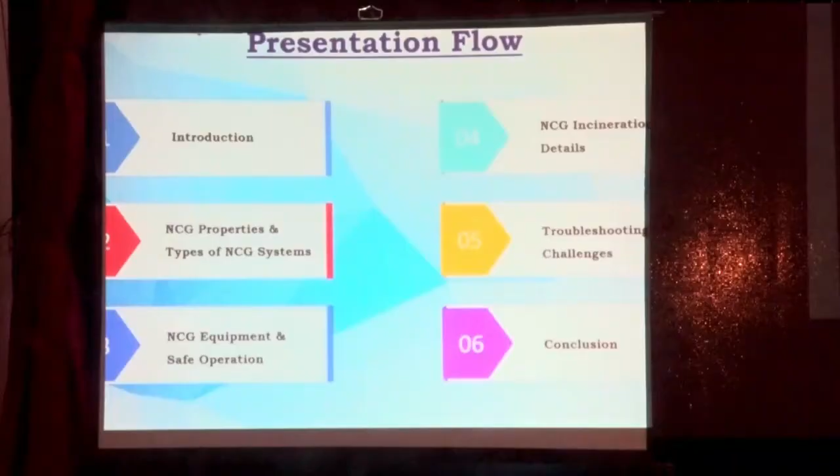Now going to the presentation. This is the flow of presentation. First we discuss about NCG. Then regarding our organization, Andhra Paper Limited. It's one of the largest integrated pulp and paper manufacturing companies in India. We produce all varieties of paper like writing, printing, copier, cup stock, cup bottom, and the LIFE.

I take 1 minute to describe to you about LIFE. It's a program we are following in our organization. LIFE is nothing but a program focusing on upgrading our conditions, updating our procedures, policy and technology through employee engagement. The main focus is an accident-free workplace. There are different major focus areas.

One is machine guarding, motorized equipment, and in that one major concept is exposure to harmful substances and environment. That's why in LIFE we take NCG as a safety element, and in this LIFE program we train our employees and update our technologies to improve our workplace.

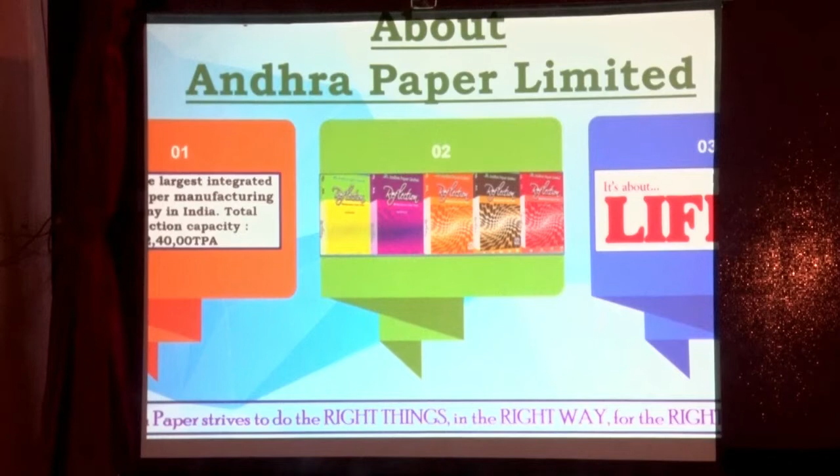Now regarding NCG, NCG are the byproduct of cooking, washing and operation of the evaporator process. After condensing these gases, those which are non-condensed are called NCG. These damage our environment and create nuisance odor. So in the NCG system, we collect and destroy the gases for a safe and hygienic workplace.

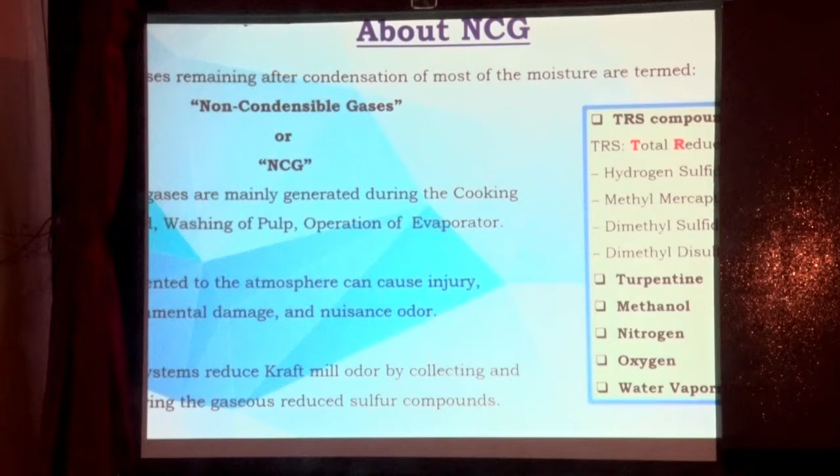The main components of NCGs are hydrogen sulfide, methyl mercaptan, dimethyl sulfide, and dimethyl disulfide. Also turpentine, methanol, nitrogen, oxygen, and water vapors are present in NCG. The properties of NCG: these are noxious, meaning a little bit of gas also creates foul odor.

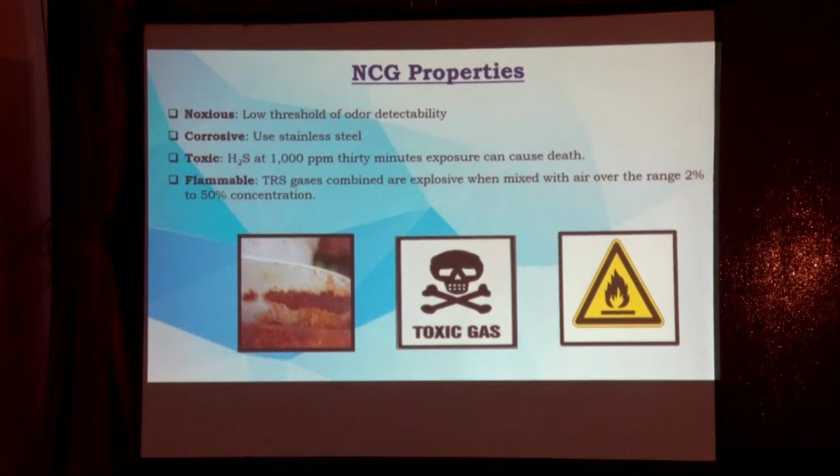These gases are corrosive. Due to these, our equipment corrodes and is destroyed. These gases are toxic. H2S at 1000 ppm exposure within 30 minutes can cause death, and these gases are flammable in nature.

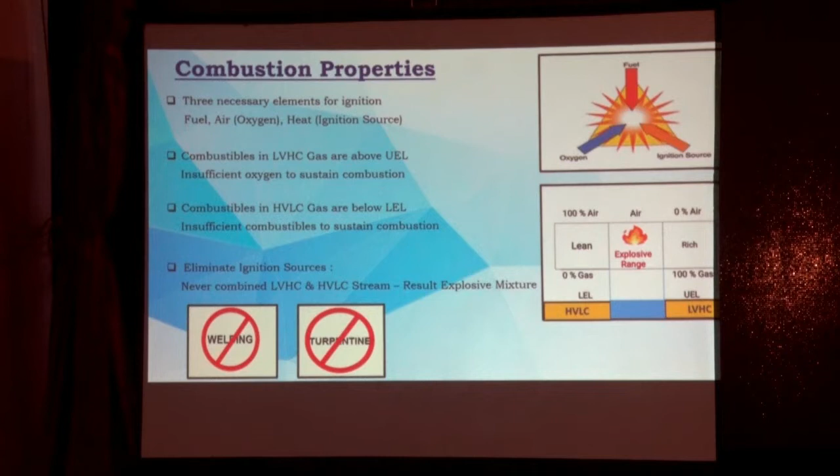Combustion properties of NCG. For combustion of anything, we need oxygen, fuel, and an ignition source. In NCG, fuel and oxygen are already present. If any ignition source comes, it may cause fire and combustion.

Explosive range: we must know the explosive mixture. In different areas, we collect different compositions of NCG, so their properties and nature are different. Oxygen is already present. If you mix these two kinds of mixture, it can create an explosive mixture in NCG. So it explodes, and we are not able to mix these different sources of NCG together.

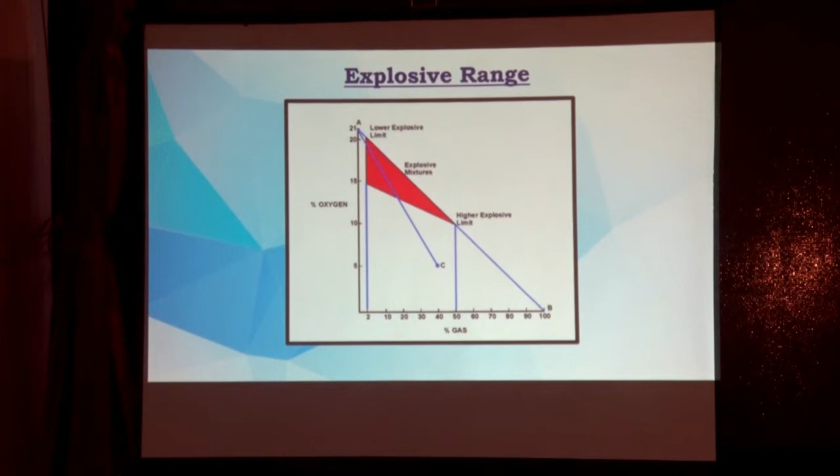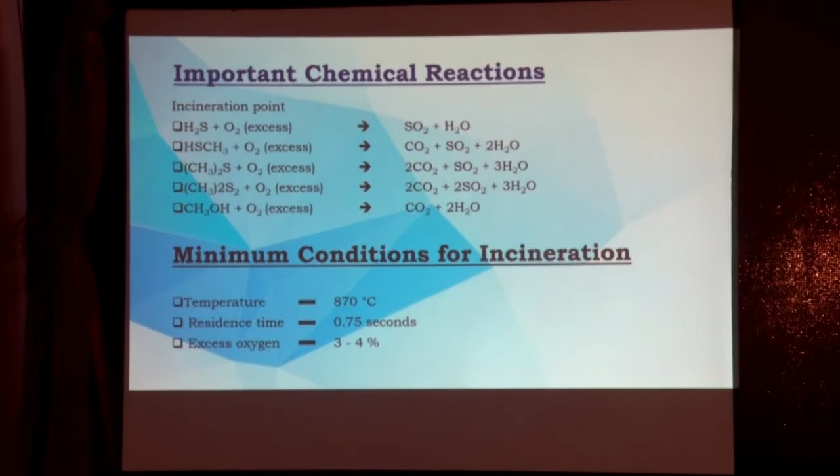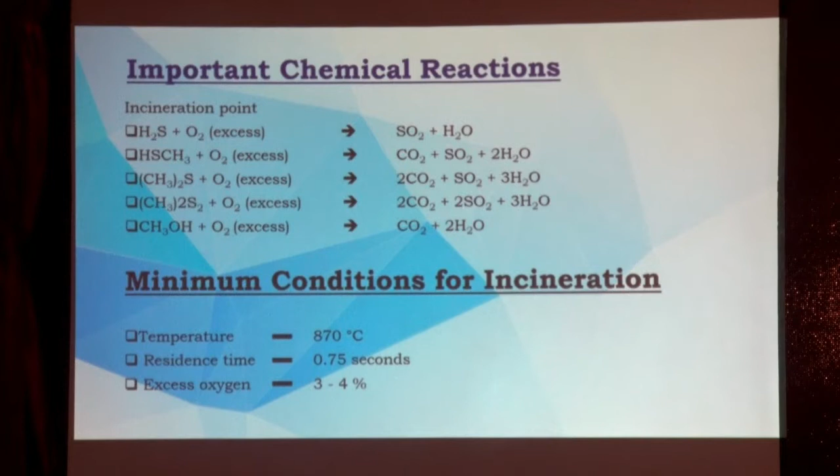This is the chemical reaction that happens after incineration of NCG, and the final product is SO2. The minimum condition for incineration of NCG is that we require 870-degree temperature, residence time of 0.75 seconds, and oxygen of 3 to 4%. If this minimum condition is not satisfied, then NCG is not incinerated and it goes to atmosphere.

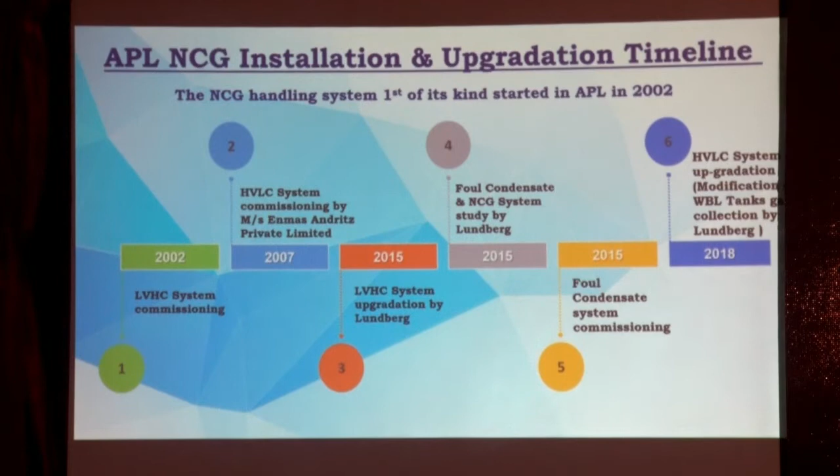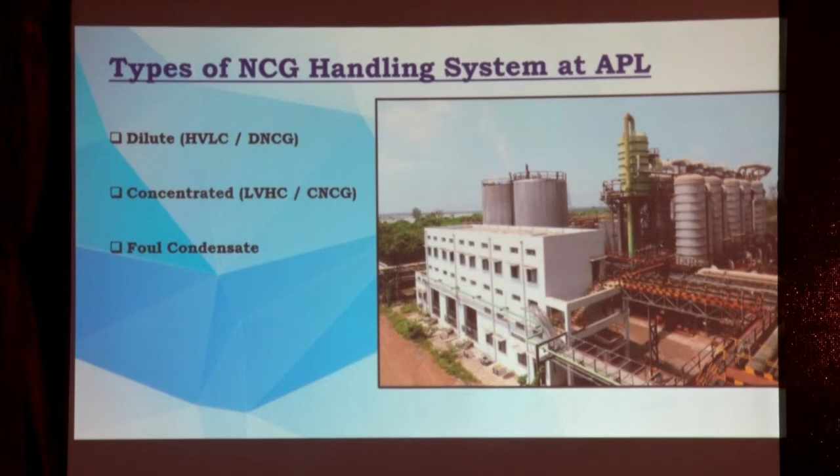In Andhra Paper Limited, we collect dilute NCG, concentrated NCG, and foul condensate. HVLC non-condensable gas is the dilute NCG gas. It is mainly high volume and low concentration gas. The sources of the gases are blow tank, filtrate tank, liquor tank, chip bin, ODL blow tank. Main composition is organics, TRS traces, air, and majorly water vapor. The property of this gas is high oxygen and low combustibles.

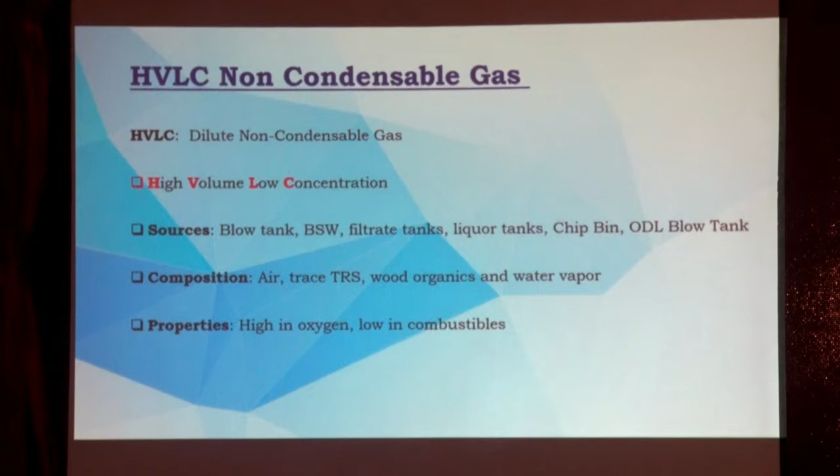Next, LVHC non-condensable gas. This is concentrated NCG gas. The source points are evaporator area, vacuum pump, seal pit, and foul condensate main tank. Composition of this NCG is majorly TRS compounds and less water vapor, and the property is high in combustibles and low in oxygen.

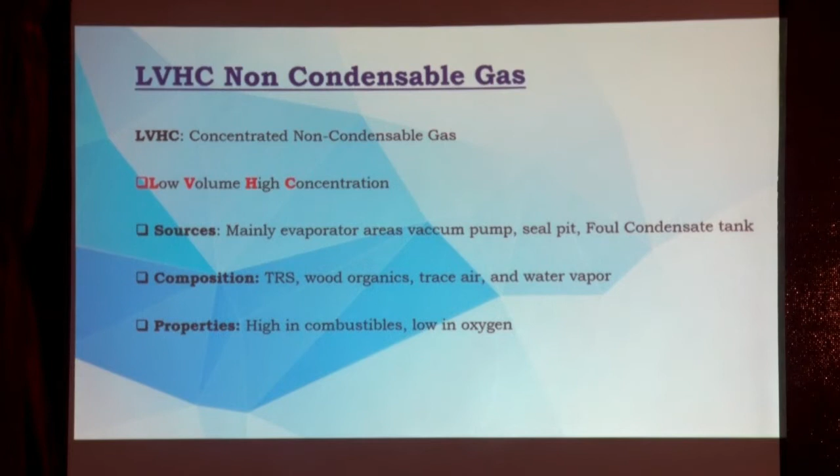Foul condensate system. Up to 2015, we did not collect foul condensate. We just drained it out, but due to the smell issue, we are now collecting it. The source points of this foul condensate are evaporator, vacuum pump, and NCG lines. Composition is mostly water, a little methanol, TRS, turpentine, and organics. Property: with turpentine content it is combustible, and we treat this foul condensate by oxidizing with hydrogen peroxide, and after that send it to ETP.

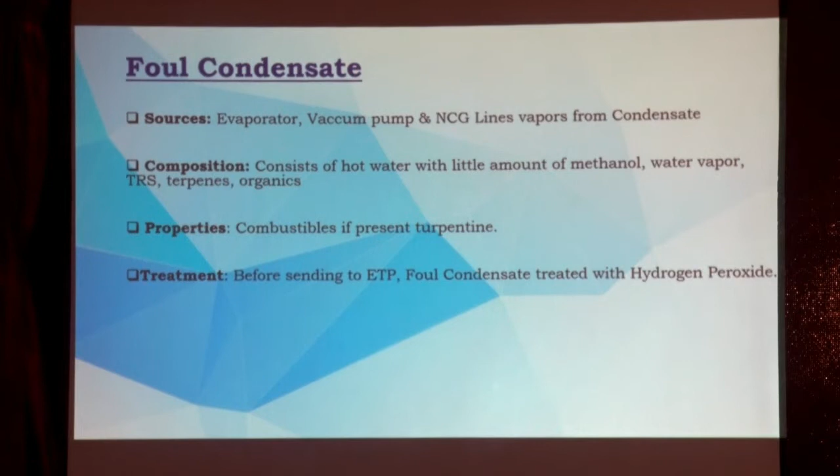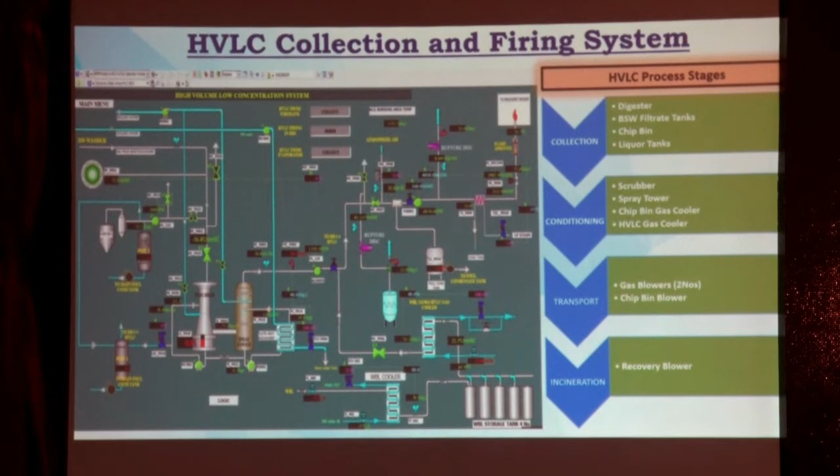This is our HVLC collection system. There are two streams. One stream is a fiber line, where we collect gases from digester, ODL and filtrate. And the second stream is WBL gas.

In digester, in pulp mill, first we collect these gases and scrub it. In the scrubber, we scrub methanol and fiber particle. After that, these gases go to the spray tower, where we cool these gases, and after cooling, the maximum vapor content is cooled down, and the NCG gases go for firing to recovery.

In WBL, we collect these gases and cool them down with a cooler, and after that, these gases go to recovery.

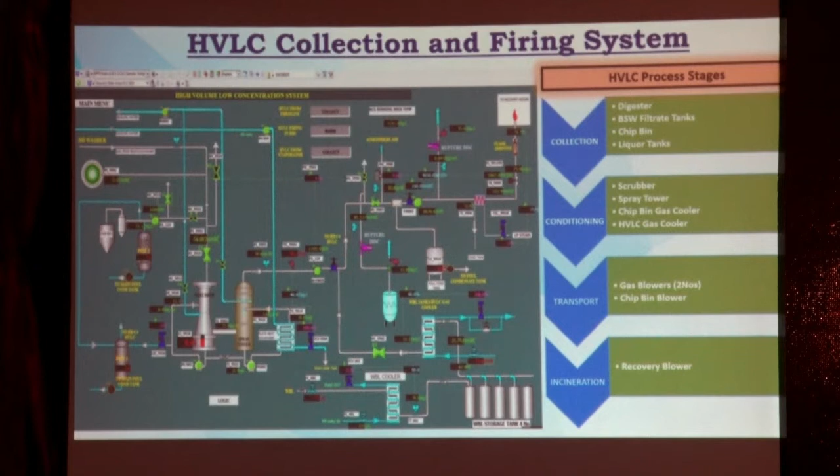In the LVHC system, we are collecting gases from the evaporator, foul condensate, foul condensate tank and evaporator seal pit. First, we collect these gases by ejector and fire in RLK, rotary lime kiln.

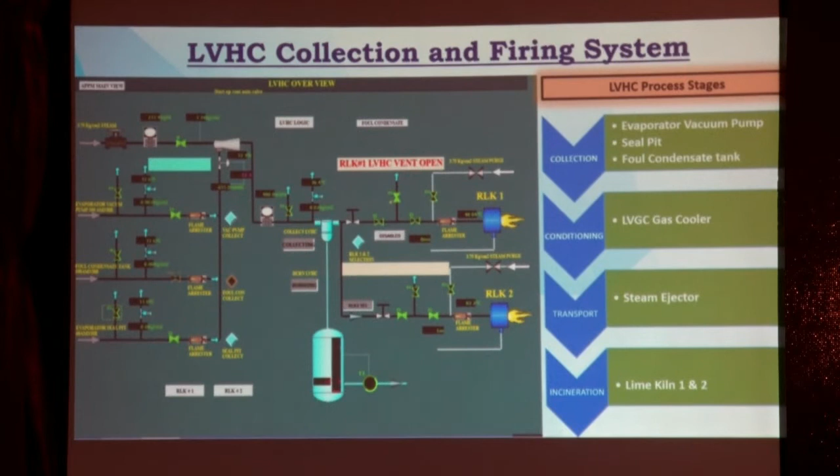Foul condensate, we collect from the evaporator, and there are LVHC and HVLC pipelines. We collect these gases and store them in the main foul condensate tank. After that, we are treating it with hydrogen peroxide and sending it to the ETP.

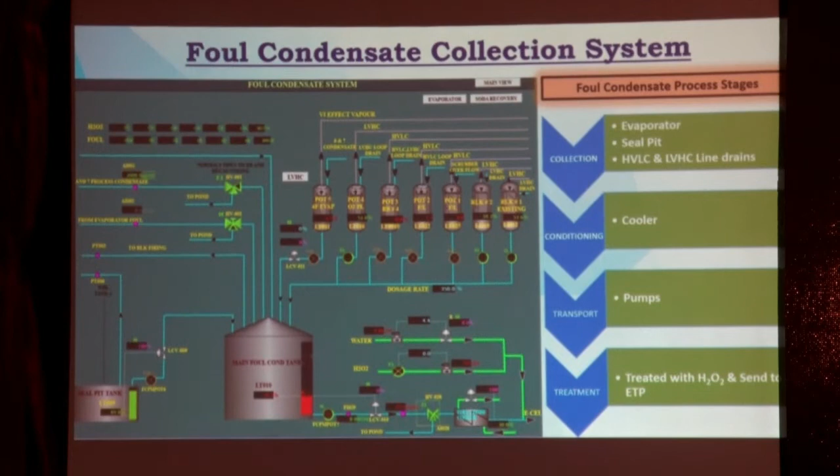Process safety equipment. For NCG handling, we handle flammable gas, so we require process safety equipment to handle these gases safely. In APL, we are using all these equipments for safety.

First we discuss the flame arrestor. It protects from flame burning back and protects live pipelines. So we are using this flame arrestor in source and incineration areas.

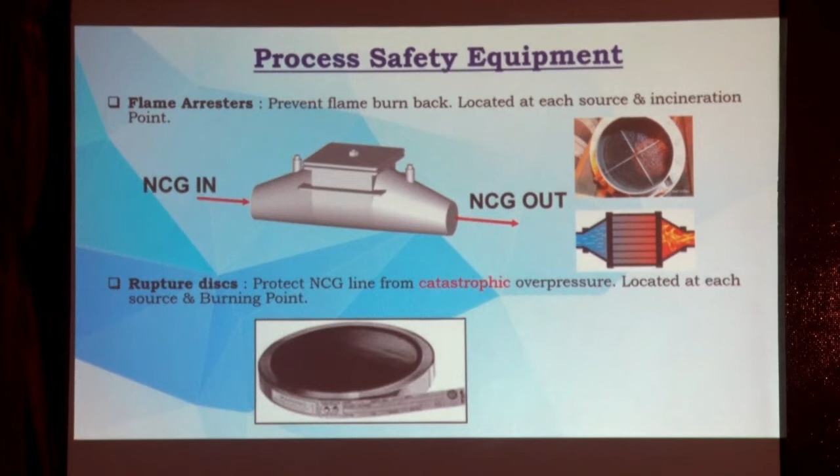Rupture discs protect fiber pipelines, and they are located near the source point and incineration point. Pressure vacuum relief protects tanks and seal pits.

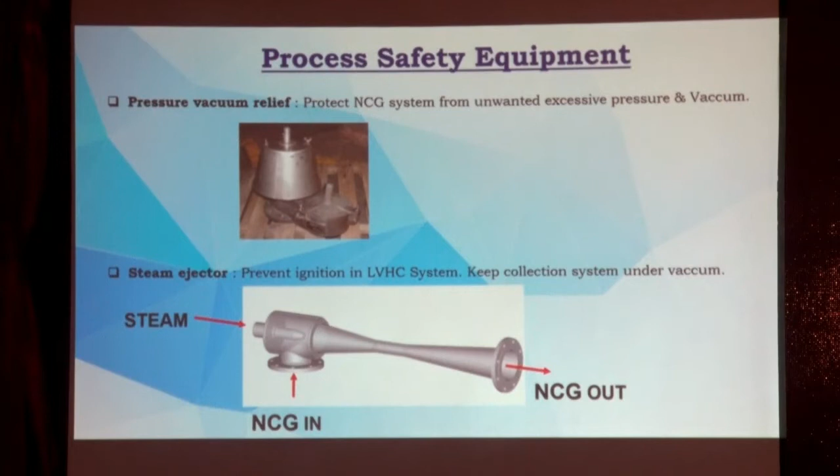Entrainment separator removes water droplets from NCG lines. It protects the system - all the condensed water is collected here, so that any water particles don't go to the lime kiln or recovery boiler.

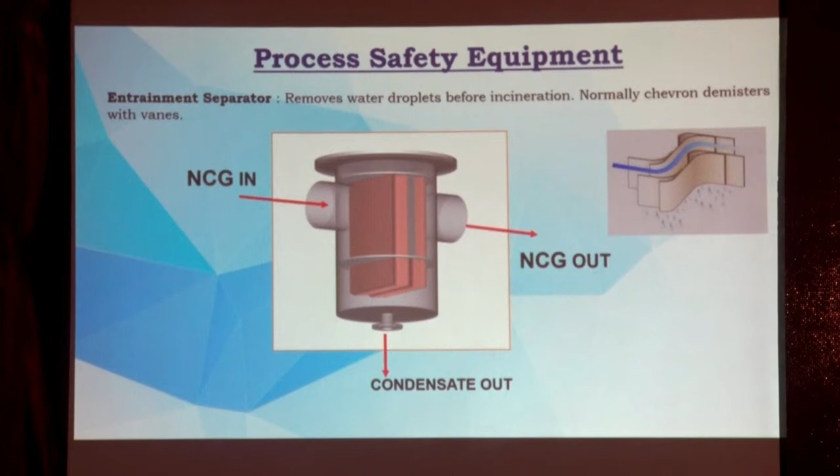This is our volume. We generate and handle NCG. Total LVHC is 460 Am3 per hour, and total HVLC is 3,500 m3 per hour.

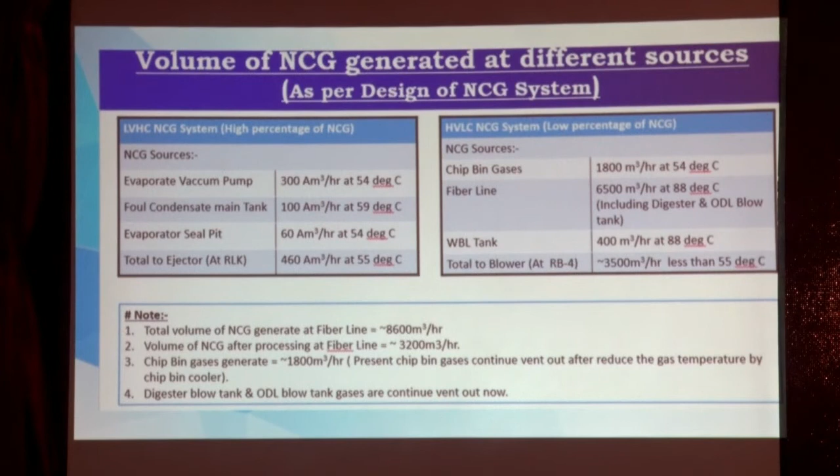We developed our own policy and procedure, and upgraded our system to handle the NCG. This is our best practice. For NCG handling, we monitor through DCS. There are safety interlocks in the HVLC and LVHC systems. Through safety interlocks, we protect our system during upset conditions.

NCG coordinator: this is a dedicated person we deputed as NCG coordinator, who coordinates the entire fiber line, recovery boiler and causticizing area, coordinating all three sections.

NCG system reliability and maintenance: we do this every annual outage and record it. Any incident in NCG, we analyze for root cause failure and do an action plan.

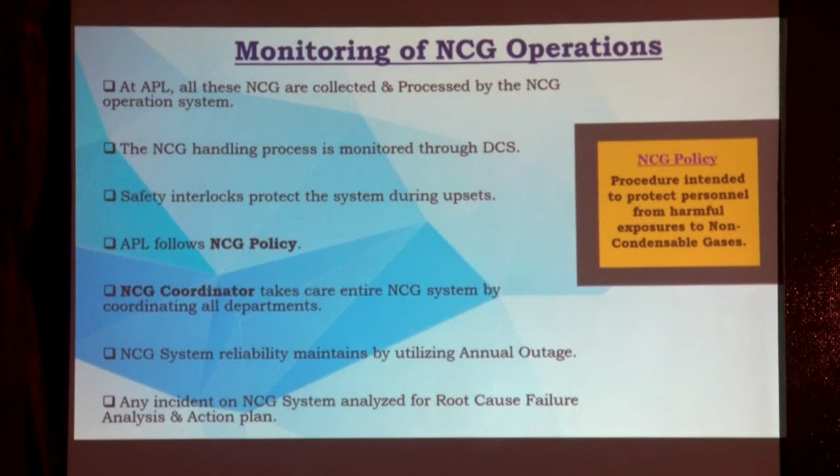We generate an NCG status report every month and update this report to our mill leadership team review, so the mill leadership team also focuses on the NCG system.

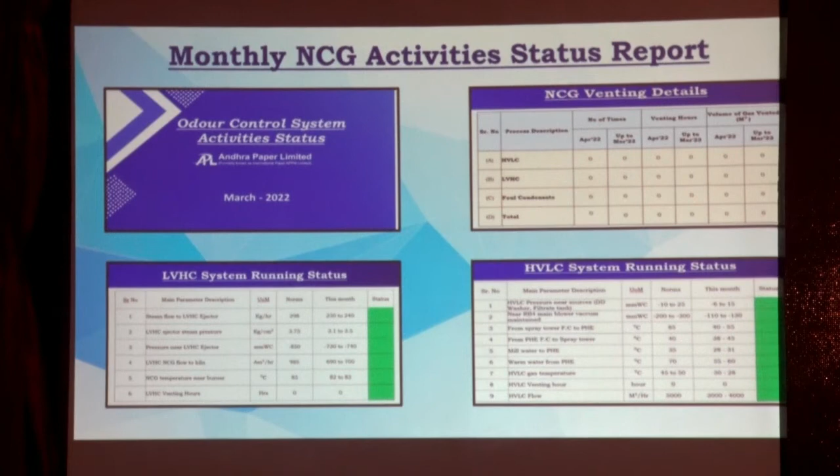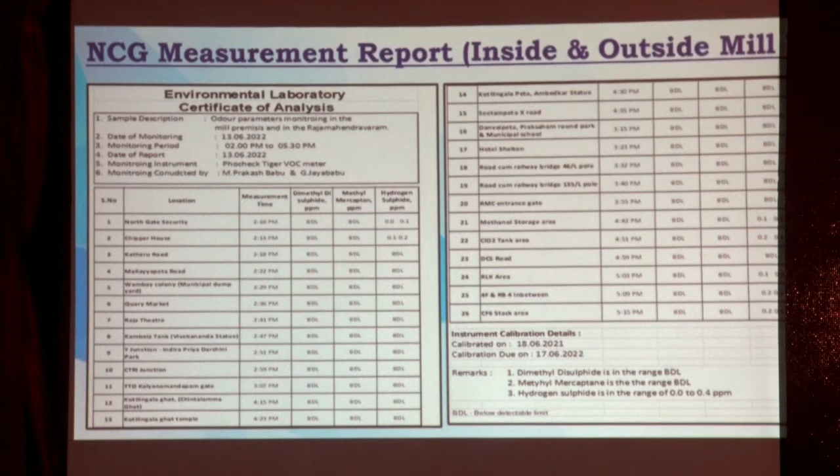This is our measurement report inside the mill and surrounding area. In this we record all the area NCG concentrations and maintain it.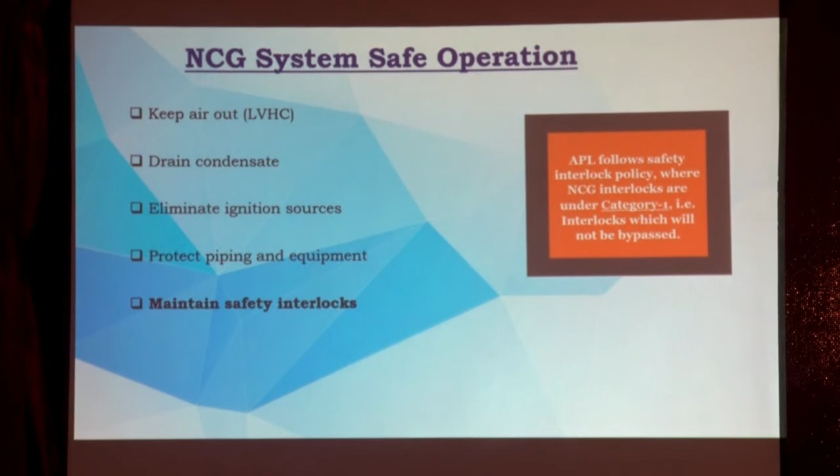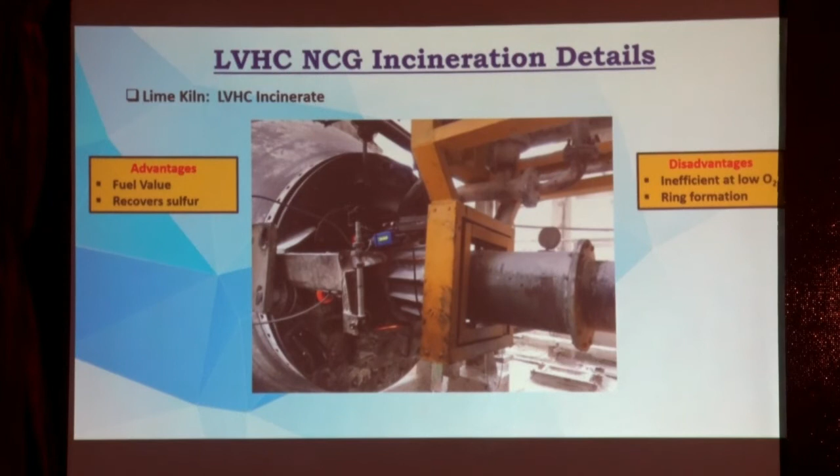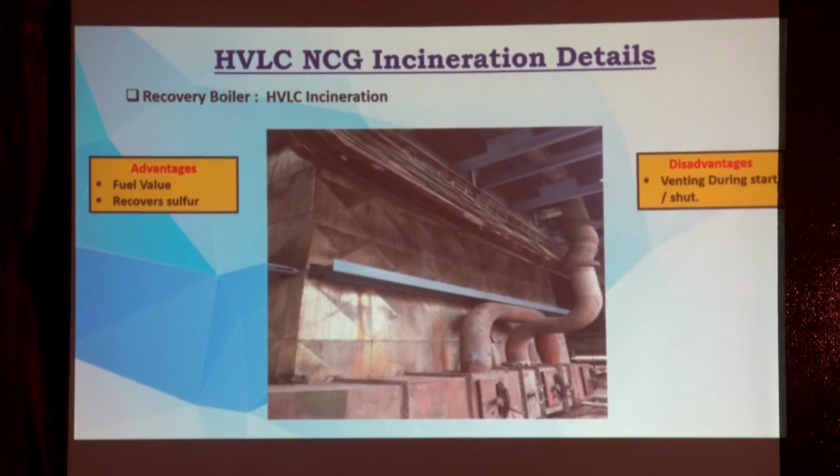This is a case study where I will describe one incident that happened in 2018 at the main foul condensate tank. The foul condensate tank exploded due to some errors that I will discuss here as a case study.

It was mainly due to their foul condensate handling. We maintain 70% foul condensate and 30% vapor space.

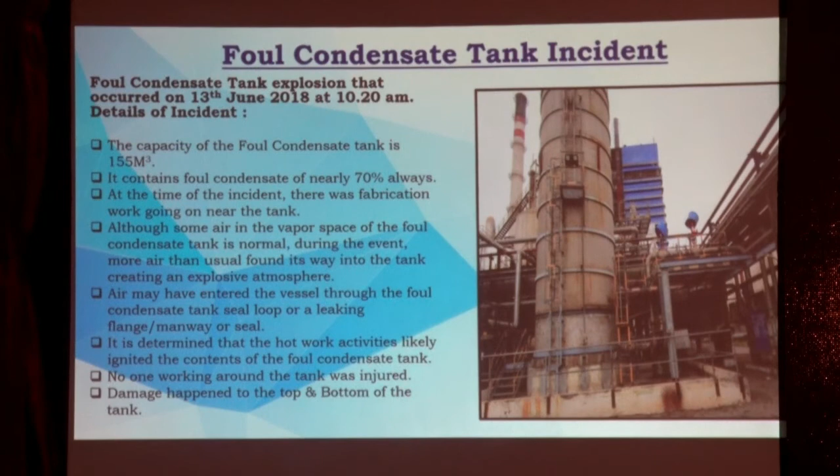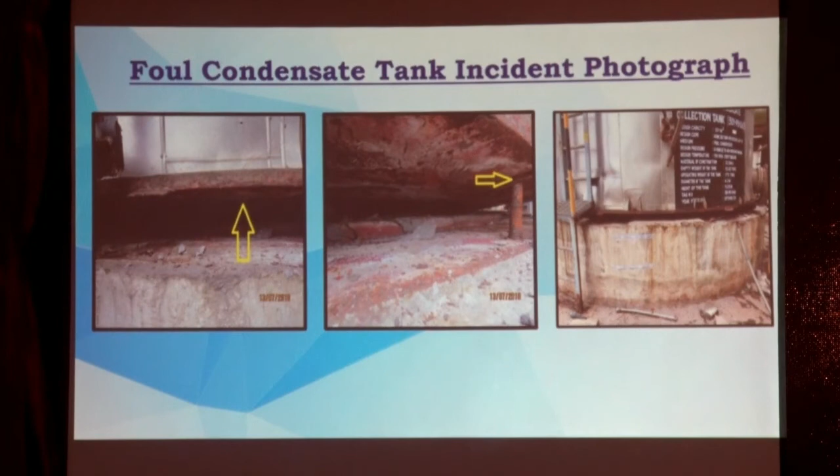The main root cause for this incident - these are some pictures from during that incident, showing damaged foundation bolts and damaged top and bottom areas.

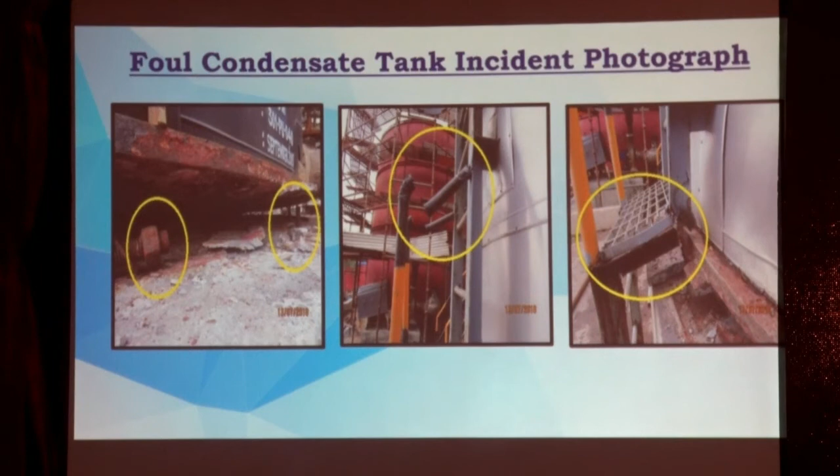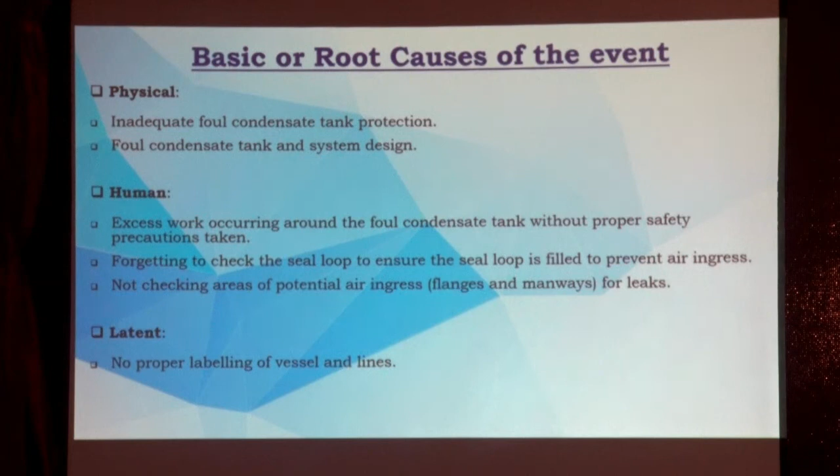The main basic root cause for this event is physically inadequate foul condensate tank protection. We have a pressure and vacuum relief system, but at that time it was not working. There was also a lot of fabrication work going on, and we suspect air entered into the system through the seal loop, so during welding an ignition source ignited the tank.

After that, we changed our pressure and vacuum relief valve. We also changed our seal loop system in the foul condensate tank. We are labelling our pipelines and equipment, and we finalized giving refresher training to NCG handling personnel for awareness of NCG.

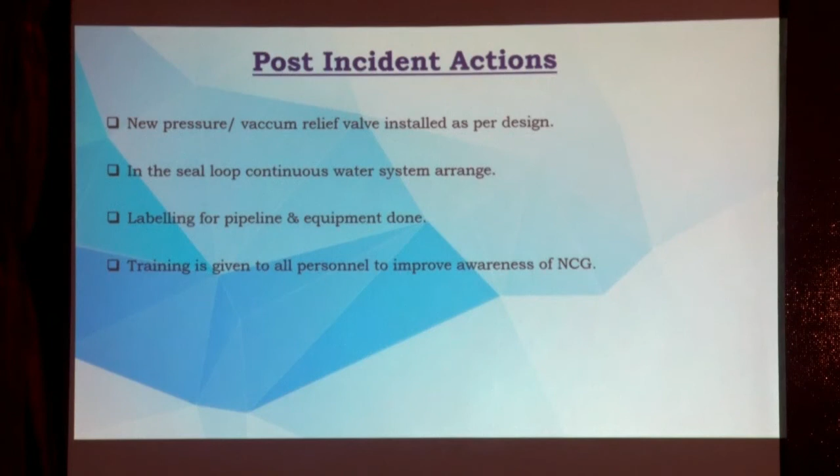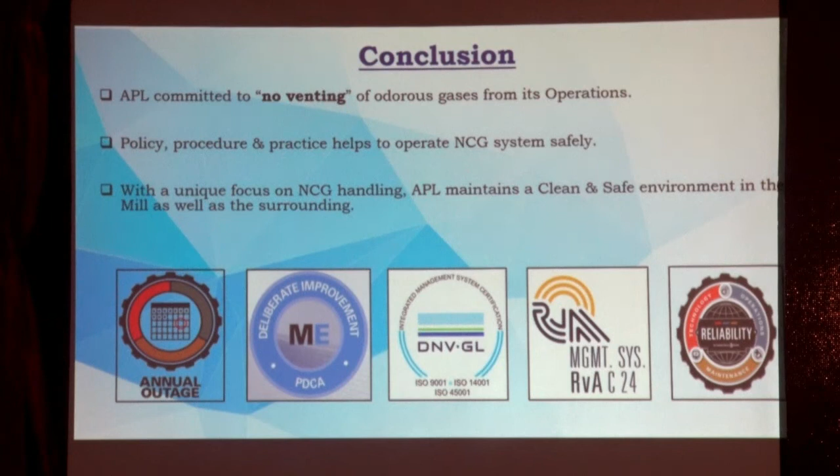Conclusion. In APL, we follow a no-venting odorous gas policy. We follow policy, procedure and practice that make our system run safely and effectively. Thank you.